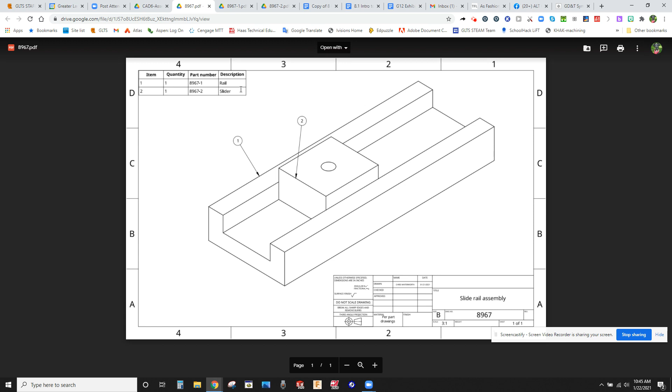So we're going to start like normal. We're going to start out by creating parts. When we're in Onshape, we're going to do this all in one part studio. We're not going to do it in two part studios like we've been doing with other components. We're going to build them together so they relate to one another, which is very important because when you have a design where you're assembling components, you do have to see how they relate to one another.

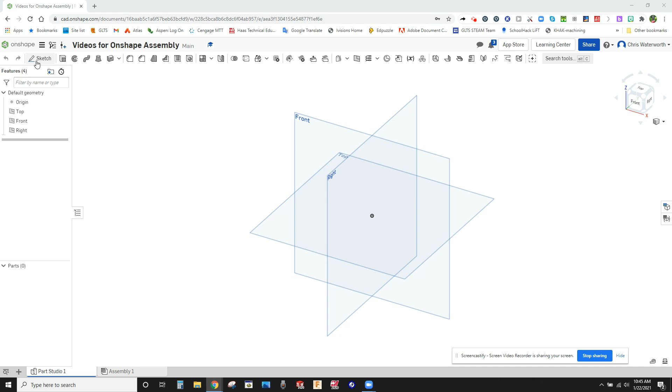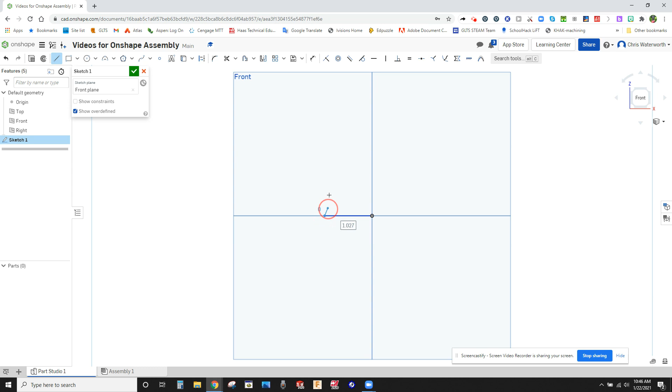So I'm just going to start with the sketch on the front plane, and I'm going to make the first part here, the rail. I'm going to do this area right here for my sketch. So I am going to just use my line tool, and I'm going to draw half of it. Here. Okay. I'm going to put a line down the bottom right in the middle because I'm going to mirror that up top. And I'm going to make that a construction line.

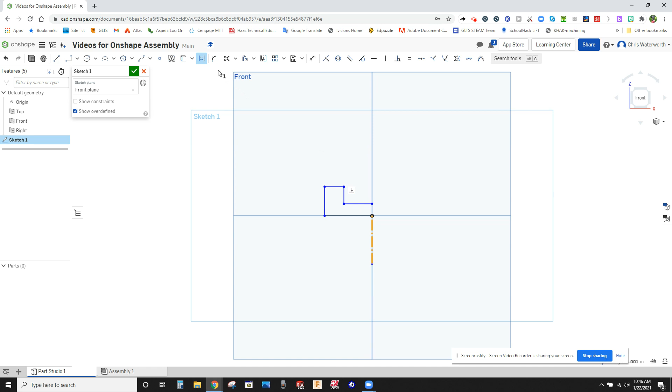Okay. So I'm going to pick these four pieces right here. I'm going to mirror those and select this for the mirror line. Okay. Now I can do some dimensioning. So the bottom piece from here to here, the width on that is 1.450.

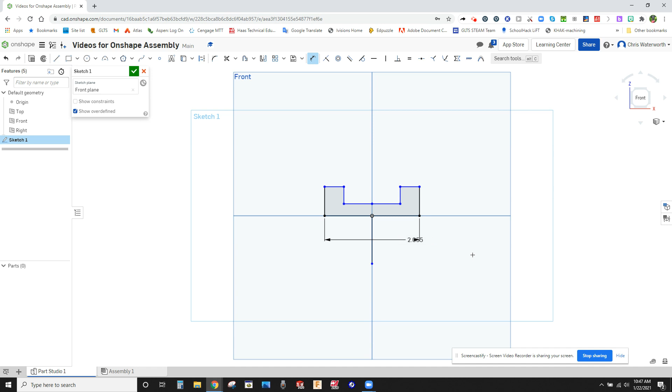The height overall is 0.540. Try that again. 0.54. That looks better. The thickness on the bottom of this area, 0.260. So the dimension from here to here is 0.26. Having troubles here. There we go.

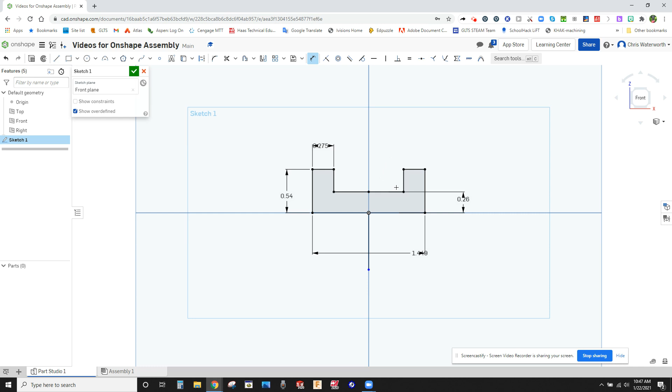The distance here is 0.275. And I actually don't even have to put in that 900 dimension here because everything's black. So, I mean, I could put it in here as a reference dimension if I wanted, but no need. Okay, so I've got a good cross section. Now I want to extrude that. My drawing, that's 4 inches.

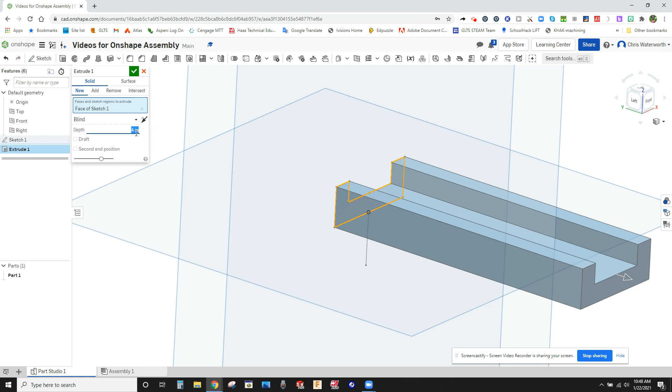All right, so we've got the rail done. So we have to start a new part within this same part studio. One of the nice things about Onshape is you can do multiple parts together. It makes design very easy for an assembly. And we're going to use this feature right here for our next sketch because that's the area that our slider is going to go into.

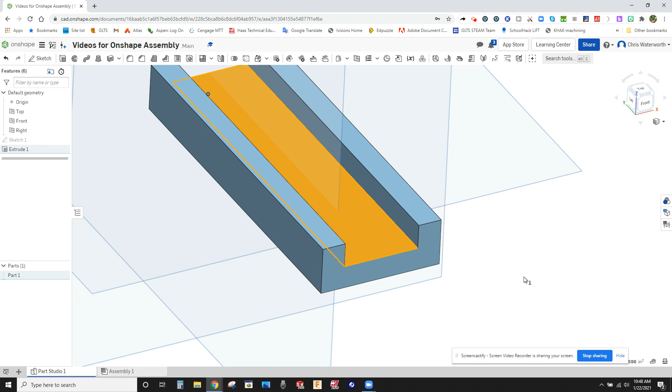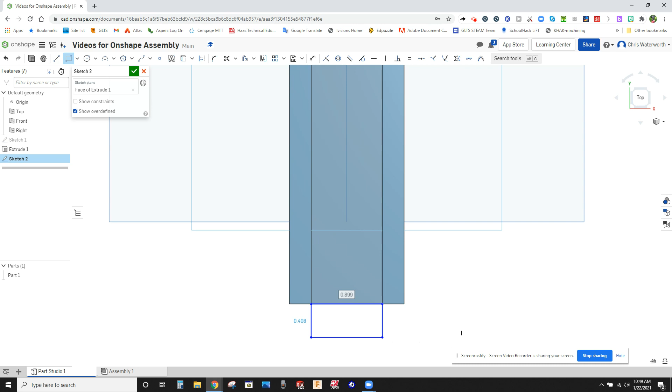So I'm going to sketch on this surface. All right, face of extrude 1. And I'm going to look at this from the top to make it easier. And I'm going to make this the exact same width as from here to here. So I'm just going to use a corner rectangle from this point down to here. And all I've got to do is dimension how long this is. Whoops.

Dimension this. I'll go look at my drawing. It's this part right here, the slider. So the length of it is 1 inch. That's it. We already know this length is already the correct length. It's 0.9, all right? But we don't have to put it in there because everything's black. So that's it. We've got a good sketch,

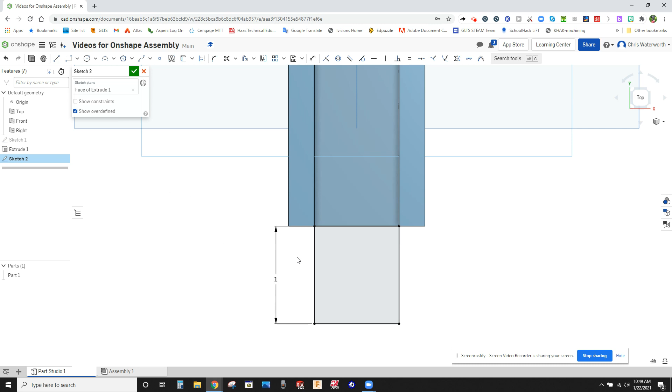and now we've got to extrude that to the correct thickness, which is 0.5. So I'll extrude, click on that, change this to 0.5, and make sure this is set to new because we're doing a new part, right? We don't want to add to it, right? We want to do a new separate component.

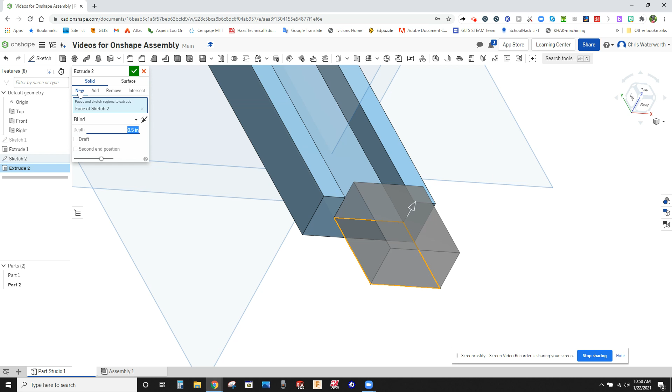And one of the things you can tell from the colors is that this is a separate component. And then if you look over on the left, you've got a part 1 and a part 2. I'm actually going to rename those to match my drawings. So 8967-1 is the first one.

And the second one is 8967-2. Okay, that way we can tell what part is what. Okay. All right, so it looks like an assembly, but it's really not an assembly because you can't move anything. And usually in an assembly, you need to move parts around or show how they can move.

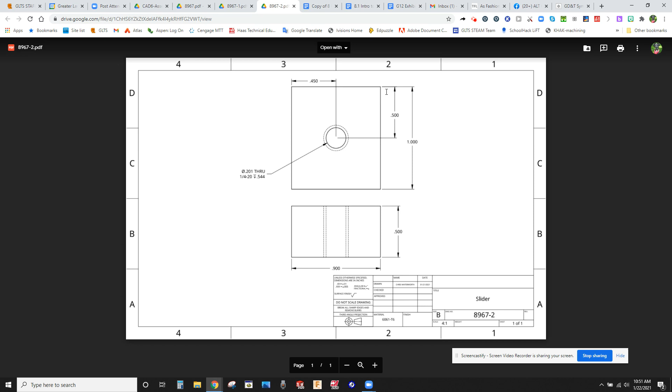So, before I go any further, I do want to put a hole in here. Hold on, go back to my drawing. We have quarter 20 through and 0.45 from the edge and 0.5 from another edge. All right, so I got to do a new sketch on here. I got to put my point here and dimension it 0.5 from that edge. And it already grabbed the center line, so I'm okay from side to side.

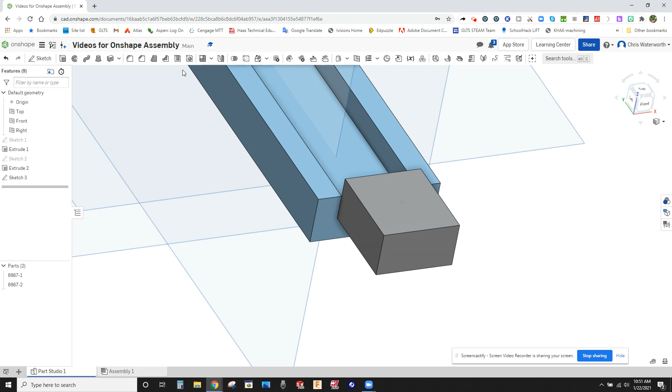And now I want to use my hole tool to create that quarter 20. I want to tap it through all actually, through hole here. Okay, now I got my part and I'm good. So what do we do with this now? All right, we want to be able to slide this thing back and forth and make sure it stays in between that rail. So what we have to do is go to our assembly now.

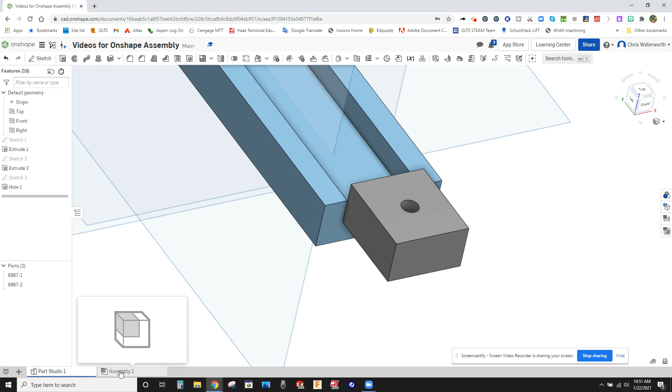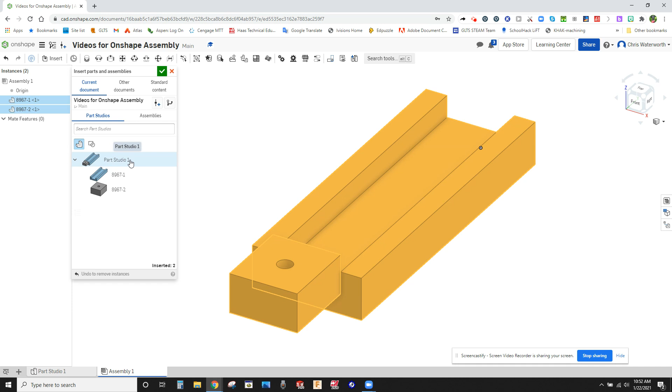And this is just a little bit different of a workspace, but what we want to do is we need to insert those components. So I'm going to click on Insert, but I'm going to click not Part Studios, but Assemblies. Oops. Part Studio, I'm sorry. I'm going to click on Part Studio. And I click on Part Studio 1 and the entire thing comes in. I'm going to put OK.

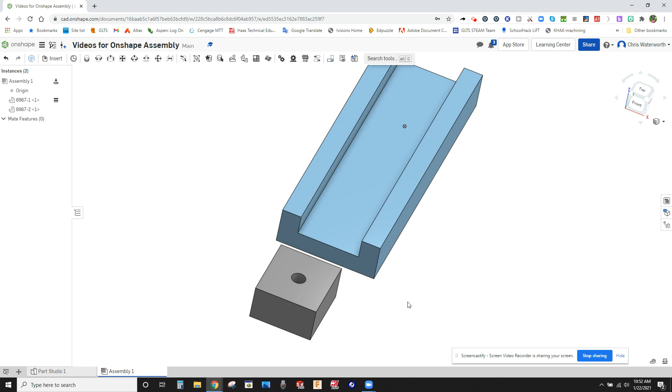Now, once you're in here, these things are free to move around. So you got to be really careful. See, like this is moving right now. I actually want to fix this in space so it doesn't move this base part of it. So I'm going to right click and click Fix. And that's not going to move now. I can't move that if I wanted to. However, this piece is still movable, but it's movable all over the place. And we want it to stay inside these rails and be connected to the bottom.

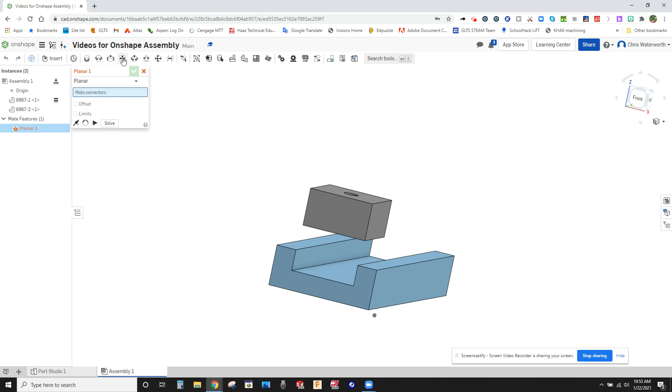So I've got to use what's called some constraints up here, or mates, they call them. And there's different types. We're going to start out with an easy one. It's the planar mate. It just means from one plane to the next. So I'm going to click on planar mate. And the first one I'll do is from this bottom surface. I'm going to click. You see, I have this little symbol goes around. This is your X, Y, and Z. I'm going to go from that surface and then click it to this surface.

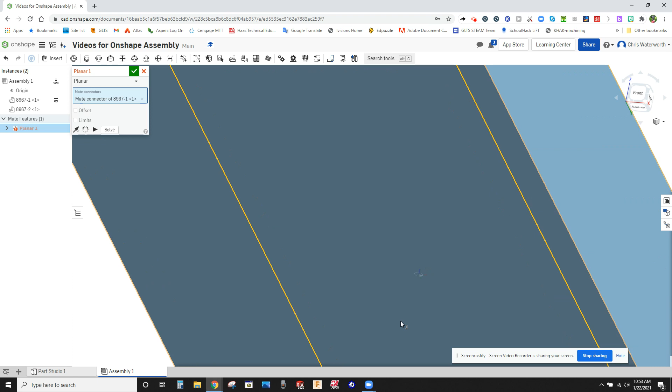All right. And that's going to lock that right down. So it's always going to stay on that surface. However, it does go side to side still, right? But no matter what, the bottom surface will be held tight against this surface right here. So we need another planar mate. And it can be either side, but we want to do a planar mate from this side to this side.

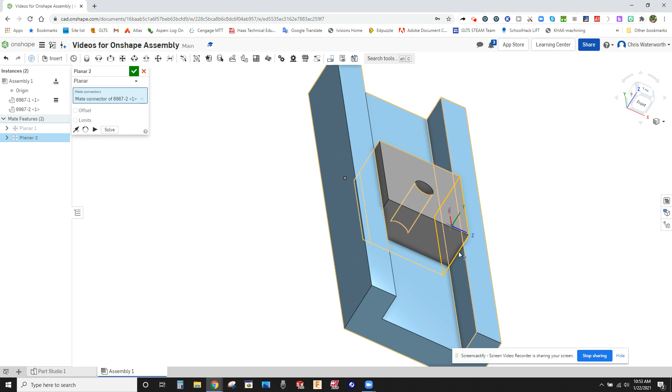Go okay. Now it will move back and forth, but it stays inside the rails. So no matter what we try to do, it's going to move back and forth. And that is a very basic planar mate. There's a lot of other ones we're going to get into, but this is just an introduction to what we use mates for. Now, with these, we can actually control how far this thing moves.

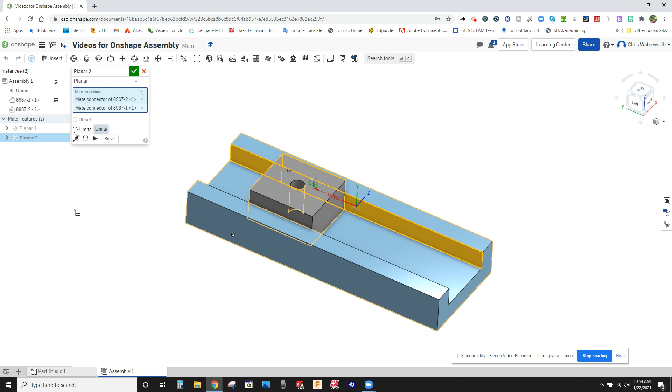All right, so if I double click on the planar mate, I can do what's called a limit. I can limit how far it goes in each direction on, in this case, the X, right? Because the red arrow, that's going back and forth along the rail. So I can do a maximum of, say, let's try like 1.5 inches. And let's try the same thing with minimum 1.5.

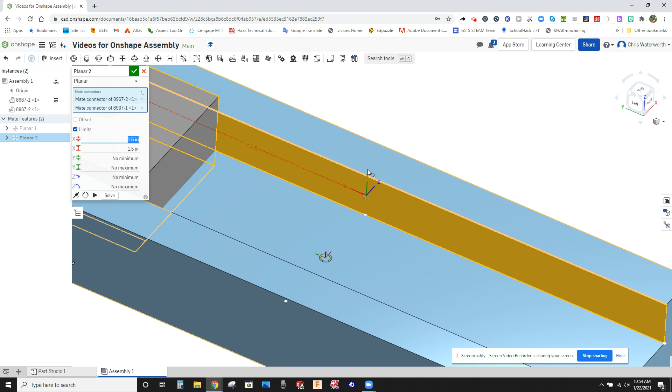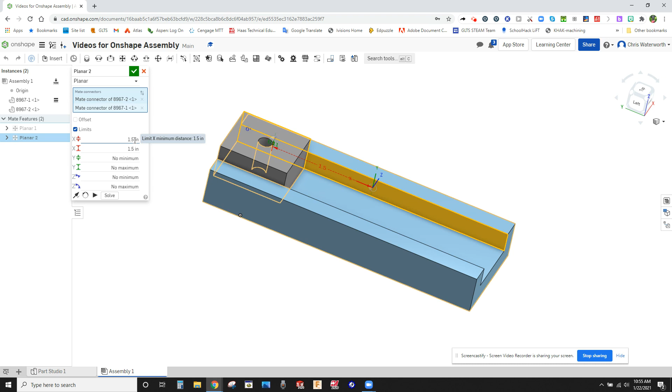Now, that's going to allow it to only go so far, and I can't really tell, where did I move it? Oh, that's locked in place. All right, try something different. So it's saying 1.5. It can go that way 1.5. Oh, I'm sorry. I should have put minus 1.5 for this one, from negative to positive. All right. I think this should work better. You gotta go in plus and minus direction.

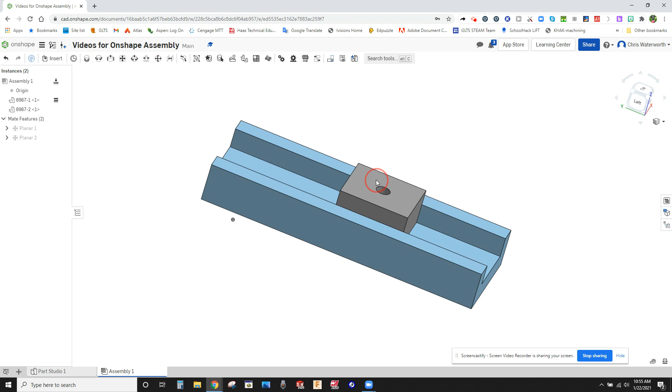Yeah. So now that will actually move around a little bit. All right. See how that moves? But it stops at a certain spot. It's actually starting to stop right at the ends. Huh, I picked a good number. I lucked out. So that's something else you can do with this, is actually limit how far it will go. So that's just a basic introduction to assembly.

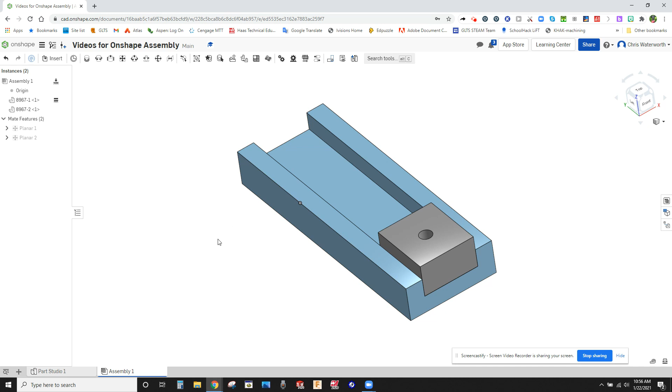So remember, in the part studio, you put all your parts together. And what I'll probably do is I'll probably add on to this and show you how you can put additional parts in here afterwards if you've had to make something else for the assembly, and different ways of mating it together.